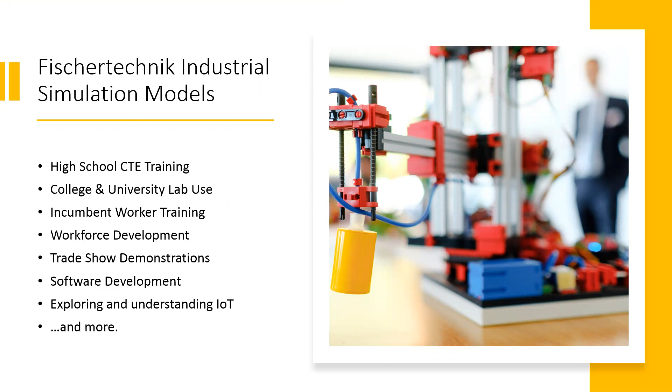Now, whether you're an educator at the high school level involved in CTE training, a college professor, or industrial trainer teaching programmable skills required in manufacturing, a company looking for ways to demonstrate their software-based solutions, or someone looking for ways to make IoT-related concepts easier to understand to employees or customers, I believe this presentation will offer some important options for you to consider.

Let's start off by considering the skills gap. If you've attended any of our other Fischertechnik education webinars, you've probably heard me discuss the importance of STEM education. STEM, of course, is the acronym for science, technology, engineering, and mathematics, and it should go without saying that STEM education has become perhaps the most discussed topic in education for the last decade.

As most of us are aware, the push for developing STEM skills in students is in large part to help best prepare them to take their place in the modern workforce. Not so long ago, when our parents or grandparents were entering the workforce, employers in such areas as manufacturing might have been satisfied with hiring workers who could demonstrate good motor skills and a solid work ethic.

But as manufacturing becomes more and more dependent upon automated processes and robotic control, employers now desperately need individuals who have a background in areas such as mechatronics, industrial electricity, mechanical components, and programming PLCs. As it ties in directly with the solutions we will be looking at in this presentation, let's consider the last skill area I just mentioned, that of a PLC programmer.

First off, for anyone who may not be familiar, let me explain exactly what a PLC is. The term PLC is an acronym, the letters of which stand for Programmable Logic Controller. Essentially, a Programmable Logic Controller, or PLC, is a very specialized computer used to control the types of machines and automated processes typically found in industrial settings, such as an automated manufacturing plant. Now, as the world of manufacturing becomes increasingly dependent upon these automated control systems, the need for workers skilled in the programming of such systems grows exponentially.

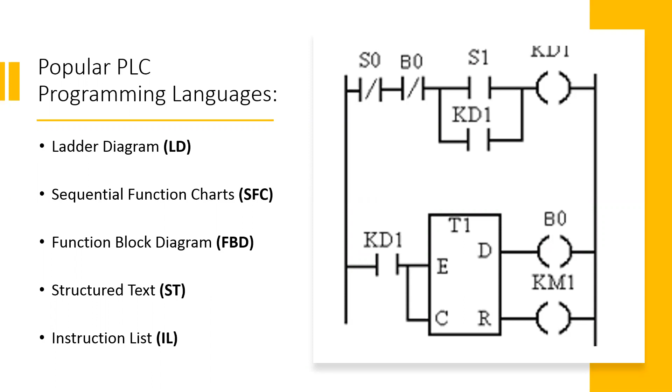We of course see the 5 most popular programming languages listed here, which are ladder diagram or LD, sequential function charts or SFC, function block diagram, FBD, structured text, ST, and instruction list, IL.

Now, once again, while many students can learn programming skills in a college lab setting, there are many other options available as well. There's high school CTE, career and technical education programs, adult continuing ed programs, vocational training, technical training and trade schools, and employer-sponsored incumbent worker training programs.

Now, that all being said, the question that still arises for the educator, whether it's in the university or the vocational school setting, is how do you teach PLC programming in a way that makes it engaging and relevant to the student, whatever their background? So how do you get away from the dryness of textbooks and video presentations and instead make it more realistic and hands-on?

But before we go further, there are other areas of focus beyond programming that need solutions for demonstrating, exploring, and understanding different aspects of automation and control systems. Now, it could be a company involved in creating or marketing a new type of software-based solution, looking for ways to make more tangible processes, which might otherwise be perceived as abstract, or to test it out in a more

realistic fashion. Maybe it's a manufacturer looking for a way to better visualize the production process for workers or stakeholders as they prepare to build a new factory. Or perhaps it's a company looking for an engaging way to demonstrate their services or solutions in a public setting, such as a trade show. Now, in each of these cases and more, there is a need for finding a solution that is engaging and which can effectively mimic and simulate real-world automated systems.

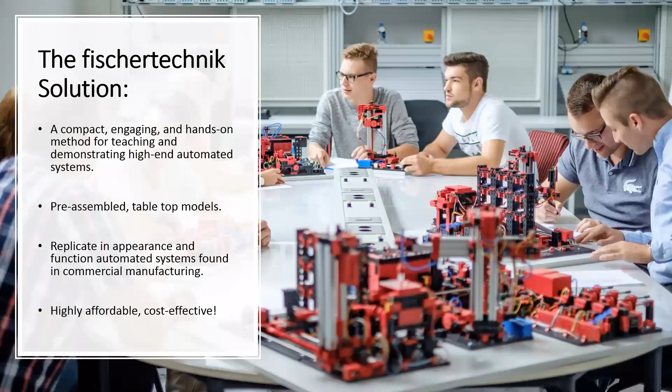And that brings us to the line of fischertechnik industrial simulation and training models. These models have been designed with the intent of providing a compact, engaging, and hands-on method for teaching and demonstrating high-end automated systems. The line consists of a series of pre-assembled small-scale models which are designed to replicate, both in appearance and function, various automated robotic machines and systems commonly used in commercial manufacturing.

Now, before we look at each of these models, let me provide you with just a little bit of background. Fischertechnik has been creating tools for teaching students of all ages how technology works for over 50 years, based around their unique building system. Now, what makes this system unique is that unlike other popular construction systems where the components are designed to simply stack, with the Fischertechnik system, it was created with more of an engineering mindset.

The core building block in the Fischertechnik system is designed to enable attachment from all 6 sides, and thus it allows for almost limitless design possibilities. Now, many of the parts in the Fischertechnik system are designed to slide together and lock in place, and the hundreds of different parts available also help to address very specific design needs.

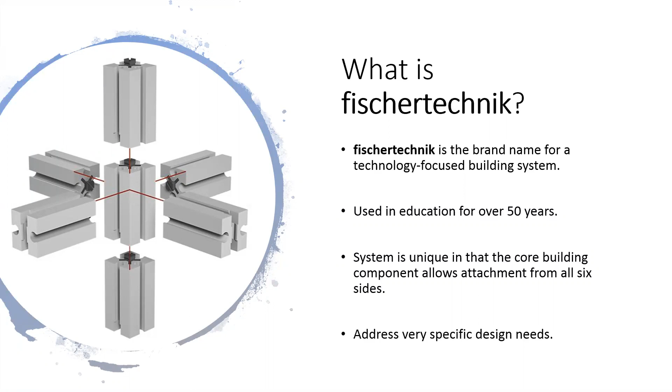The Fischertechnik system was created back in the 1960s by German inventor Artur Fischer, who's noted for countless innovations used in the construction and the automotive industries. Mr. Fischer, at the time of his death in 2016, held more patents in his name than Thomas Alva Edison had amassed during his own lifetime.

Now, besides Fischertechnik, Mr. Fischer was the inventor of synchronized flash photography back in 1949, as well as the creator of the expanding nylon wall plug, which is used in conjunction with a screw or a bolt to help anchor heavy objects to walls. His company, the Fischer Group, employs thousands of individuals worldwide, producing many variations of fastening devices used in building construction. They also produced numerous components used in the automobile assembly method, as well as providing consulting services to companies who wish to employ state-of-the-art manufacturing processes.

Now, once again, the focus of the Fischertechnik sets, whether those intended for the retail market or for classroom use, has always been on helping to foster an understanding of technology. Many of the products offered by Fischertechnik for the education sector are subject-specific sets focusing on different STEM-related skill areas such as mechanics, pneumatics, robotics, or renewable energy. Now, in many of these sets, students are asked to build a progression of models using the unique Fischertechnik system and then perform various experiments which allow them to explore and understand aspects of that subject.

Now, there are also sets designed to enable schools to offer a complete standards-focused curriculum-based program where the focus is on project-based learning. Now, in these project-based programs, students dive deep into engineering and learning all aspects of the design process, which requires them to work in groups and create various devices and automated machines to meet the criteria put forth in a series of real-world scenarios based upon their own trial and error experimentation and research.

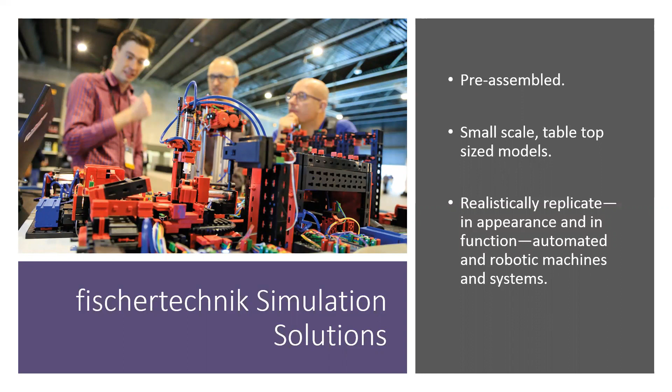Models in the fischertechnik simulation line include conveyor belts, punching machines, 3-axis pick-and-place robotic arms, color sorting lines, high-bay storage warehouse systems, and many more.

Now, besides these individual models which focus on specific automated processes, fischertechnik also offers an integrated factory simulation model. This model consists of 4 individual workstations, a vacuum gripper robot, a high-bay storage warehouse, a multi-processing station with an oven, and a sorting line with color detection, all working together as one self-contained material cycle.

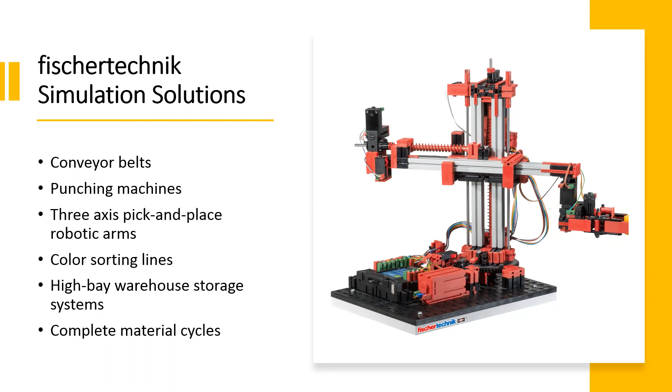Now, before we look at the models in the simulation line in more detail, let me briefly outline some of the advantages of using fischertechnik solutions. Now, I do apologize in advance if the first few points are things I mentioned earlier, but I think in each case it's worth repeating.

First, fischertechnik simulation solutions allow educators to offer engaging hands-on tools for teaching, exploring, and understanding various aspects of automation and programming. Now, this can be for understanding how automated systems work, or for having a tangible physical system to observe and work with in a PLC programming-focused learning environment.

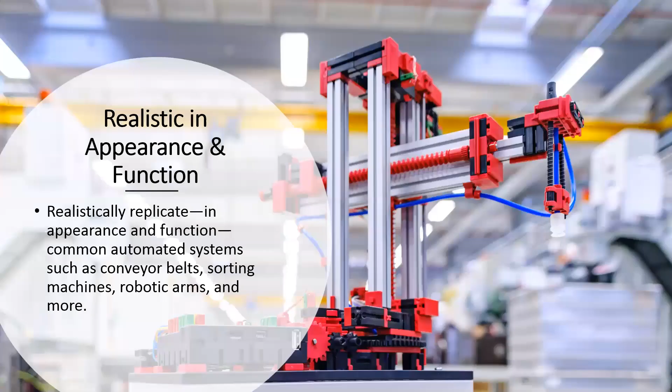Advantage 2. The models, once again, are designed to realistically replicate, both in appearance and function, common automated systems such as conveyor belts, sorting machines, robotic arms, and much more. Now, because the models are compact, in most cases tabletop sized, they are not only ideal for use in the classroom or in office demonstrations, but also for demonstrating software or other technology-based offerings in a trade show environment.

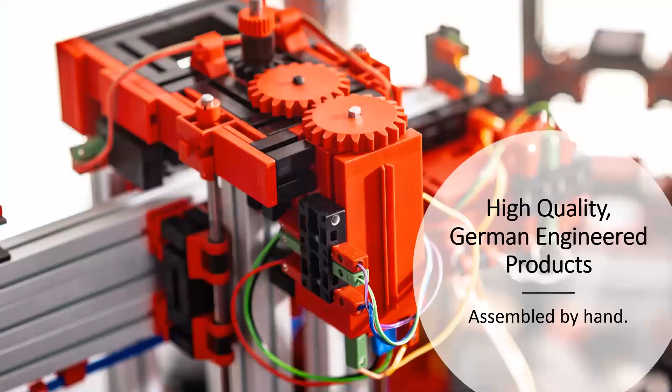Another factor is quality. Each fischertechnik simulation model is a hand-assembled, high-quality, German-made product. Each model, with one exception which I will address later, is currently available in 2 different versions. The first version is a 24-volt version, which is designed for use with industry-standard PLCs. Now, whether you use Allen Bradley controllers, Siemens controllers, or controllers from manufacturers such as Honeywell, Mitsubishi, General Electric, or others, you can control these 24-volt versions with the PLC you prefer.

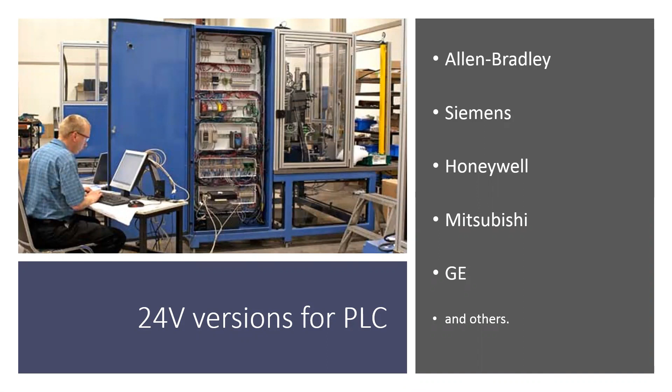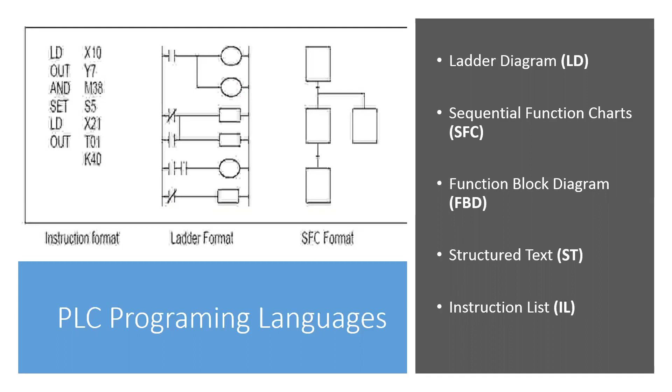Likewise, just as you can use your choice of controller, you can also use your preferred programming language, such as the ones you see listed on the screen now. Now, please note that with the 24-volt versions, no PLC is included, and all programming and programming guidance, as well as any power sources or other hardware, are the responsibility of the end user. Of course, this should not be an issue, as these models are designed specifically for industrial users, or for those users teaching or exploring industrial processes involving PLC programming.

On the other hand, for non-industrial users and educators not versed in or familiar with PLC programming, there are also 9-volt versions of each model available. Now, these 9-volt versions ship pre-wired to fischertechnik's own proprietary robotic controllers, the Robotics TXT controller, and each controller is pre-programmed using fischertechnik's own RoboPro graphic programming software.

Now, the only additional component required with the 9-volt versions will be the addition of 1 or more 120-volt power adapters as specified with each model. I will address this as we look at the various models so you'll know what needs what. But otherwise, in most cases, these should be ready to use out of the box.

Now, if you're involved in demonstrating or exploring IoT, also known as the Internet of Things, besides the fact that many end users have adopted many of the models in the primary line of simulation and training solutions for IoT purposes, fischertechnik also offers a special IoT-focused version of the factory simulation designed specifically for exploring and understanding cloud control and what is sometimes referred to as Industry 4.0. Now here, the model is designed to be both controlled and monitored from a special web-based dashboard. We'll of course discuss this in more detail later in the presentation.

And finally, fischertechnik simulation models are cost-effective. While I won't get into naming names, I will say that if any of you have looked into other hardware-based industrial simulation options that are available in the marketplace, you'll probably notice that the entry point for many of these products could easily be $20,000 to $30,000 or more. fischertechnik simulation solutions, on the other hand, are only a fraction of that price, as well as being compact, realistic, and high-quality learning and demonstration tools. So on that note, let's look at each of the models which are available.

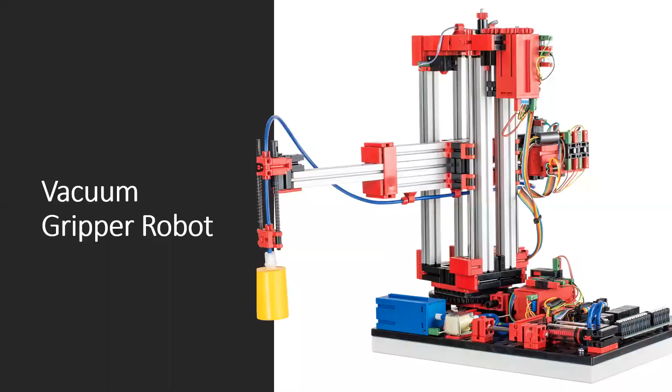First up is the vacuum gripper robot. Now, as you will soon see, the vacuum gripper is a 3-axis robotic model with a vacuum gripping device. The model is designed to precisely pick up and position workpieces in 3-dimensional space.

The model includes 3 encoder motors, 3 push-button limit switches, a vacuum suction device, a compressor, which is the blue brick component that you see on your screen in the video, and a solenoid valve. The model's dimensions are approximately 9 by 19 by 15 inches with an approximate weight of about 7 pounds.

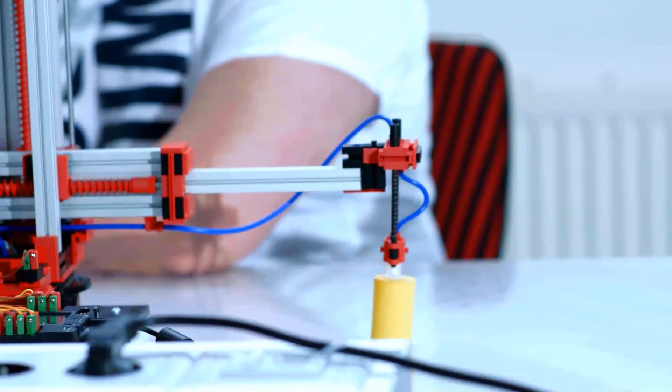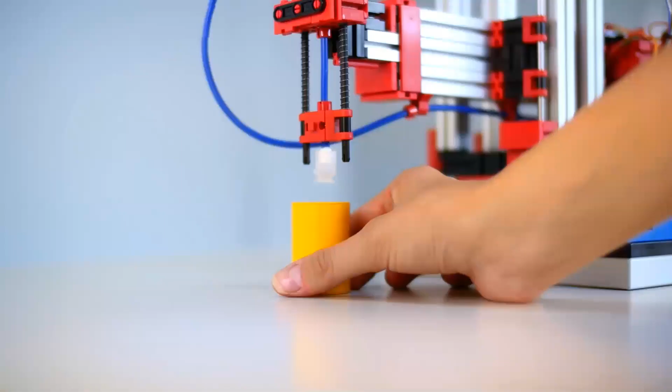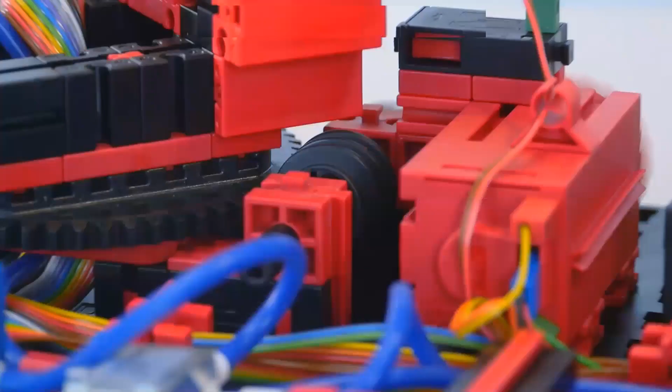Now, the 24-volt versions of this model, as well as the other 24-volt versions we will look at, each have a relay board for motor polarity reversal and both a multi-pin connector with 26 pins with a grid of 2.54 millimeters, as well as additional PCB terminals with push-in connectors for all inputs and outputs. Now again, the 24-volt version of this model, as with all of the 24-volt versions we will look at, will require you to provide the PLC and the programming.

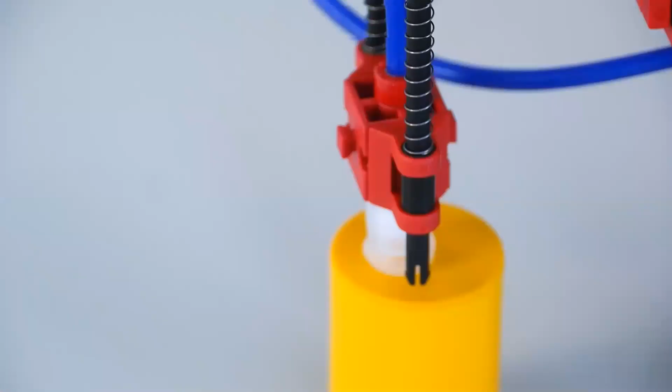Now the 9-volt version, which is the version that you actually see in this video, will once again come wired to the fischertechnik robotics TXT controller and will ship fully programmed using RoboPro graphic programming software. Now, if you wish to create your own programming, individual licenses of RoboPro are available on our website. Otherwise, for this 9-volt version, only the addition of a single power adapter will be required.

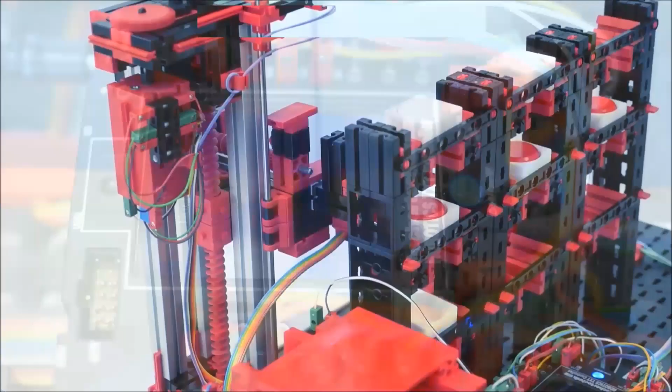Next, we have the automated high bay warehouse. The model features a transfer station with a conveyor belt, along with a shelf stacking mechanism for storing and retrieving workpiece carrier trays, and 9 individual storage spots. Components of this model include 2 encoder motors, 2 mini motors, 4 push-button limit switches, 2 phototransistors, 2 LED light barriers, and a selection of different colored workpieces along with carrier trays for each.

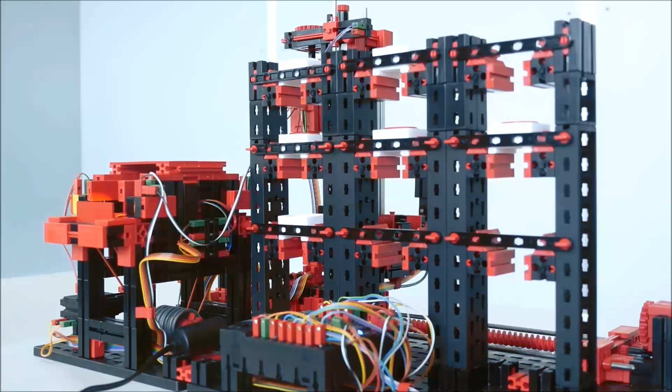I will note that this model is a favorite among educators I know who are teaching programming because it gives you a lot to work with in regards to the movements of the picker mechanism, as well as the precision required to properly store and retrieve each piece, each step, which will of course require its own specific coding. Now, the dimensions for this model are approximately 19 by 28.5 by 15 inches with a weight of approximately 18 pounds.

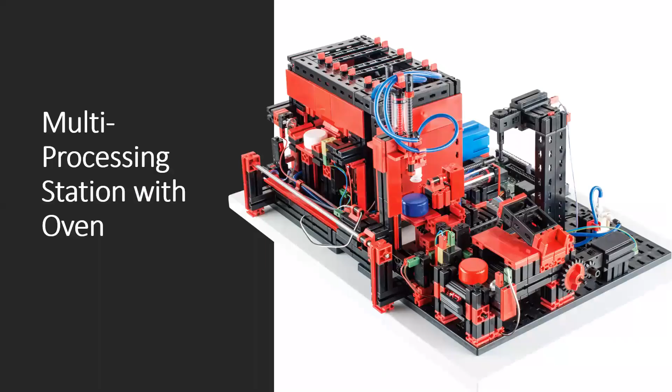Once again, the 24-volt version has a relay board for motor polarity reversal and both a multi-pin connector with 26 pins with a grid of 2.54 millimeters, as well as additional PCB terminals with push-in connectors for all inputs and outputs. Again, you will need to provide your own PLC and programming. The 9-volt version again is pre-wired to a pre-programmed robotics TXT controller, and one 120-volt power adapter is required.

Now, the next model, as you see already on your screen, is the multi-processing station with oven simulation.

And it should start up in just a second. Just catching a second here. Excuse me for the slight technical malfunction here. I think we're good to go now.

Once again, we're looking at the multi-processing station with the oven. Now, the model you're going to see features a furnace simulation with a pneumatic sliding door. Now, there's a downstream processing station with the pneumatic transfer unit that includes a vacuum gripper, a cutter with a rotary table, and a conveyor belt.

Now, components used on this model include 4 mini motors, 6 push-button limit switches, 2 phototransistors, 2 LED light barriers, 4 solenoid valves, and a compressor. The dimensions for this model are approximately 20 by 14 by 12 inches with a weight of about 11 pounds.

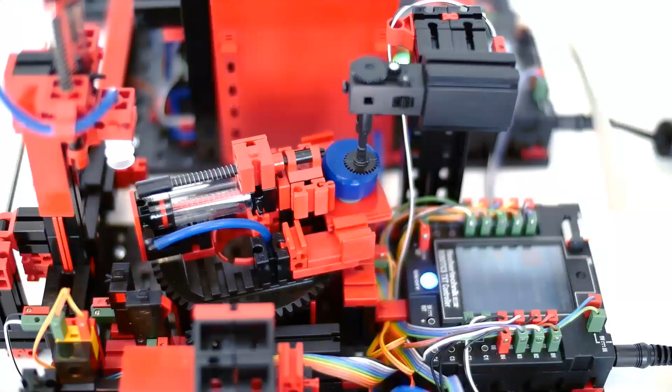Now again, this model is available in both 24-volt versions for use with the PLC of your choice, and the 9-volt version in this case is connected to 2 robotics TXT controllers. So in this case, you're going to need 2 power adapters, which will be required for all the operations. We'll just let this play for a minute.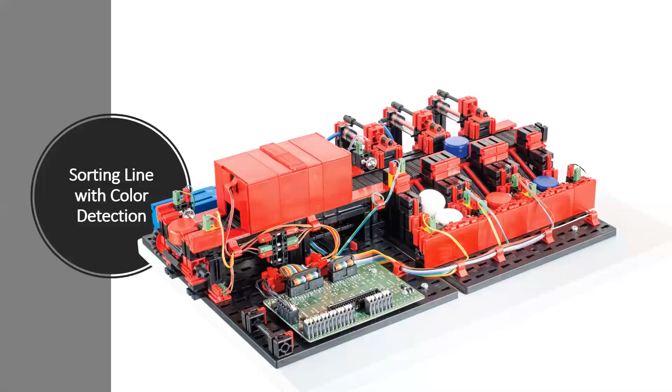Now, the next model in our progression is the sorting line with color detection.

And we don't need the audio here. So we will kill that.

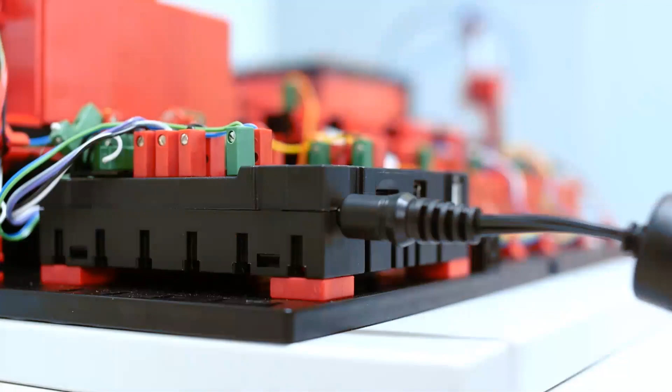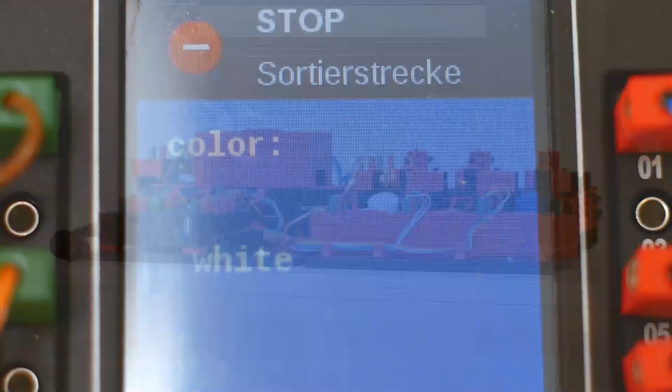Now, this simulation features a system for detecting workpieces of different colors and sorts them via a conveyor belt into 3 different storage bins. Now, components on this model include 2 mini motors, 5 phototransistors, 5 LED light barriers, 3 solenoid valves, a compressor, and an optical color sensor. The dimensions for this particular model are approximately 20 by 14 by 12 inches with a weight of about 10 pounds.

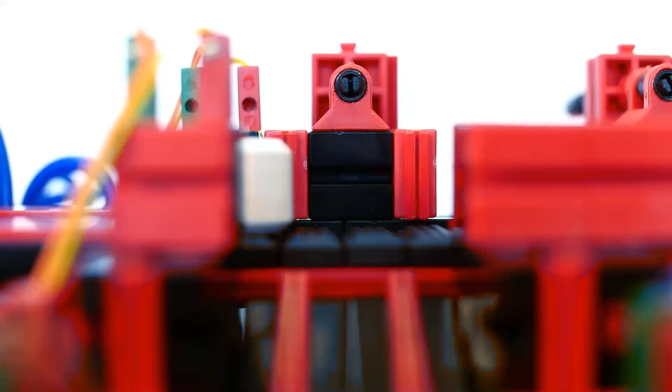Now, as with the models we've looked at before, the 24-volt version has a relay board for motor polarity reversal and both a multi-pin connector, again 26 pins with a grid of 2.54 millimeters, as well as additional PCB terminals with push-in connections for all inputs and outputs. Again, you need to provide the PLC and the programming. The 9-volt version, once again, comes pre-wired to a pre-programmed TXT controller, and so only 1 power adapter is going to be required with this.

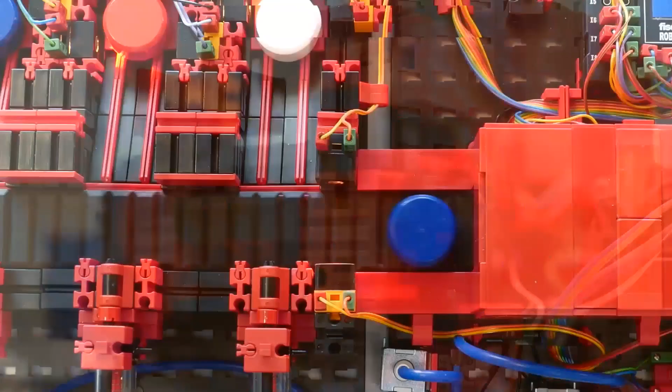Now, the next model is the factory simulation, which combines the 4 models that we've just reviewed here: the vacuum gripper robot, the automated high bay warehouse, the multi-processing station with the oven, and the sorting line with color detection, all of which are combined into one self-contained material cycle.

Now, the cycle works like this. Work pieces are retrieved from the automated high bay warehouse using the vacuum gripper robot and then moved to the multi-processing station with oven. After the work piece has been processed by this machine, it is then sorted by color in the sorting line with color detection before being again moved by the vacuum gripper robot to the automated high bay warehouse for storage.

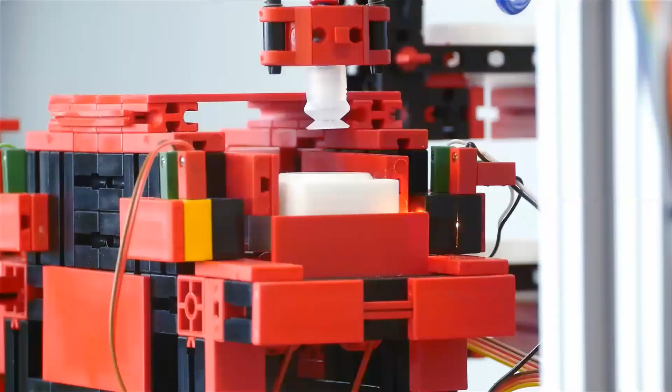Now, as we've already discussed the components of each model previously, I won't belabor it by restating them here. What I do want to discuss are the dimensions of this model as a whole. Now, as it again combines 4 individual models into one cycle, it has a much larger footprint. And in this case, it's approximately 39 by 31 by 16 inches, and it has a total weight of between 43 and 46 pounds, depending on whether we're talking about the 24-volt version or the 9-volt version.

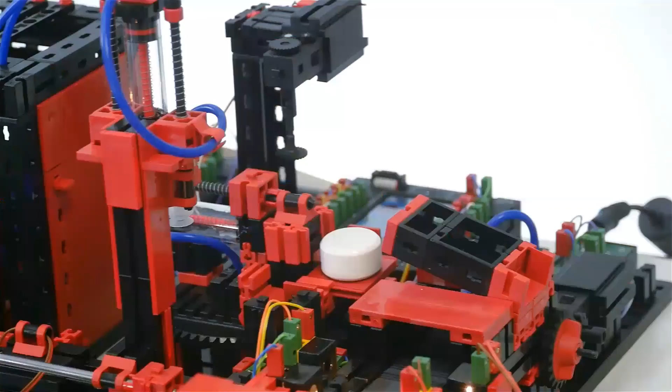Now, due to these dimensions, please note that this model will only be shipped flat as freight on a pallet. And I also want to point out that the factory simulation models tend to be in very high demand, so please anticipate a possible turnaround time of up to 3 weeks prior to any orders for this model leaving our warehouse. Now, a few other things to note.

First, this is again available in both 24-volt and 9-volt versions. Now, in this instance, the 9-volt version is wired to 5 robotics TXT controllers. As such, it's going to require 3 power adapters because of the way the controllers are wired together.

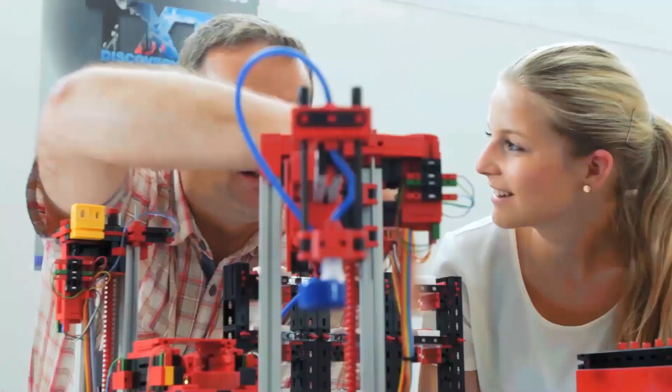And as always, the 24-volt version will require the end user to provide all PLCs, all programming, and any other hardware required. Again, each station on the 24-volt version has a relay board for motor polarity reversal and both a multi-pin connector, 26 pins with a grid of 2.54 millimeters, as well as additional PCB terminals with a push-in connector for all inputs and outputs.

Now, before we move on to the next group of models, I do want to mention that there is a storage option available for those users of either of the 2 factory simulations we've just discussed, who will need to transport the model or who would like to protect it when it's not in use. Now, the travel case consists of an aluminum case maker profile with plastic plates and steel ball corners, as well as 4 steel tilt handles and angle protection corners.

The upper section of the case is partially lined with soft foam blocks in different heights to help cushion the model, and it also has 3 internal zipper pockets for storing cables and other accessories. Now, the lower portion is lined with hard foam, and it's designed so that once the top of the travel case is removed, the model can remain in the bottom section of the case and be fully functional.

The case has exterior dimensions of approximately 41 by 33 by 17 inches with a weight of approximately 53 pounds. Please note, though, that even when using the travel case, these models will still need to be shipped flat.

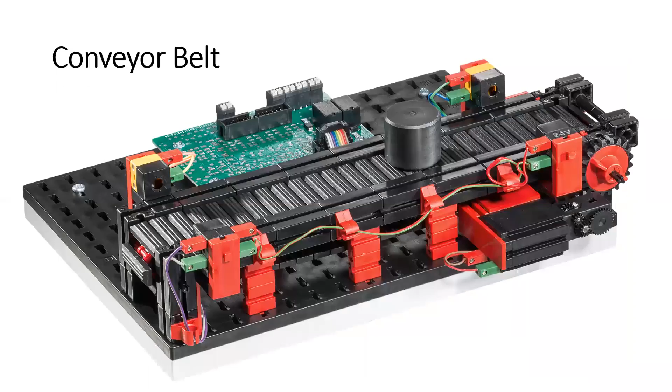The next model is a basic conveyor belt. Now, this is a transport belt with a length of 275 millimeters that is used to transport workpieces with a diameter of up to 29 millimeters. Multiple conveyors can easily be connected to increase the length of transport as desired.

Now, components on this model include an XS motor, a push-button limit switch, 2 photo transistors, and 2 LED light barriers. Dimensions of this model are approximately 14 by 10 by 4 inches with a weight of under 2 pounds. Now, as I mentioned before, this is available in both a 24-volt version, as you see here, and also 9-volt versions connected to the robotics TXT controller as shown here. One 120-volt power adapter is again required for operation.

The next model is a variation of the conveyor belt, which includes a punching machine. This feature is essentially the same conveyor as we just looked at, except this time with the machining station built in. Components on this model include 2 XS motors, 2 push-button limit switches, 2 photo transistors, and 2 LED light barriers. Dimensions of the model are approximately 15 by 12 by 7.5 inches with a weight of about 3.5 pounds.

Again, it's available in both the 24-volt variation as shown in this photo and in the 9-volt version wired to the robotics TXT controller, which requires one 120-volt power adapter for use.

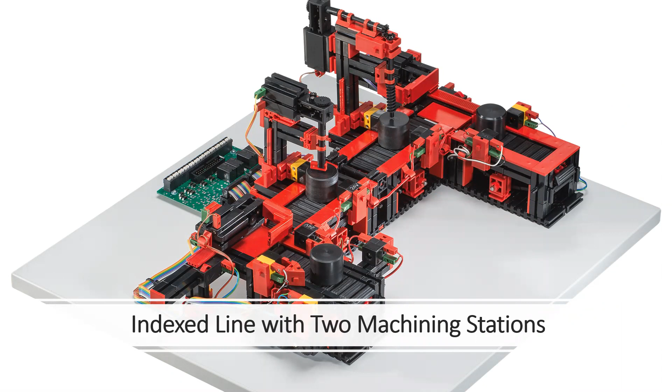The next model is the indexed line with 2 machining stations. Now, this model features a U-shaped conveyor line consisting of a milling and a drilling station and 4 conveyor belt sections. Components on this model include the 4 conveyor belts I just mentioned, 8 XS motors, 4 push-button limit switches, 5 photo transistors, and 5 LED light barriers. The dimensions of the model are approximately 19 by 18 by 11 inches with a weight of about 8 pounds.

Again, it's available in both the 24-volt version for use with PLC as shown here, and a 9-volt version wired to the pre-programmed robotics TXT controllers, 2 of them as you see here, and requiring in this case 1 power adapter.

Next is a variation on the idea of a pick-and-place robot, which is the 3D or 3-axis robot.

Hang on a second here.

The 3-axis robot has gripping forceps, which it uses to help it quickly and precisely position the workpieces it picks up in 3-dimensional space. The degrees of freedom for the robot are as follows. Axis 1 turns 180 degrees. Axis 2 can move forward or back 90 millimeters. And axis 3 can raise or lower 150 millimeters.

Components on this model include 2 XS motors, 2 encoder motors, and 4 push-button limit switches. Dimensions of this model are approximately 19 by 16 by 9 inches with a weight of about 6 pounds. Again, as with the other models we've looked at, this is available in both a 24-volt version for use with PLC and the programming of your choice, or a 9-volt version wired to a pre-programmed robotics TXT controller and requiring one 120-volt power adapter.

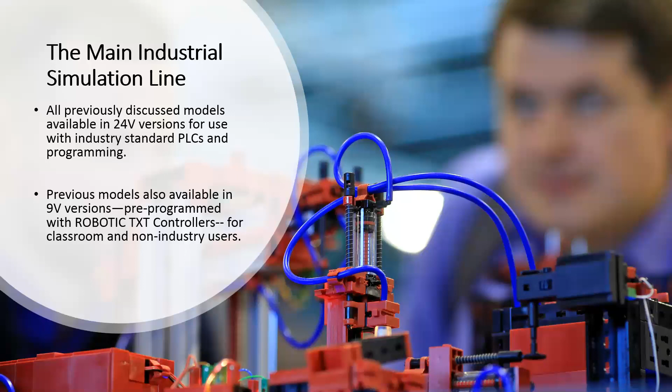Now that concludes our look at the first 9 variations of simulation models, all of which again are available in both 24-volt versions and 9-volt versions. Now the next simulation model is designed to specifically address the topic of cloud-based monitoring and control. This is the Training Factory Industry 4.0 model.

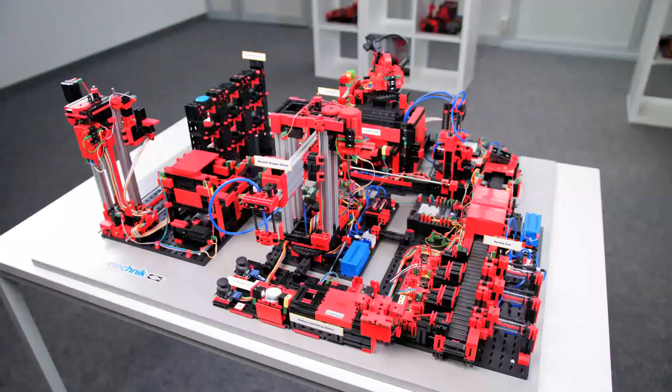Now, this model was designed to help address how the recent changes in industrial production, driven by digitization, have created a need for stronger networking and more relevant information on all production levels. With this Industry 4.0 update of the existing factory simulation model, such digitization activities can be simulated, learned, and applied on a small scale before they are implemented on a large scale. Now, as the following video provides a nicely narrated overview of how the factory works, I'm going to step back for a moment and allow you to watch and listen to the narrator here.

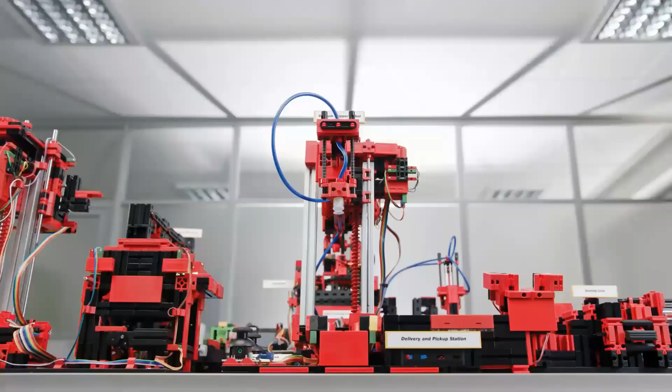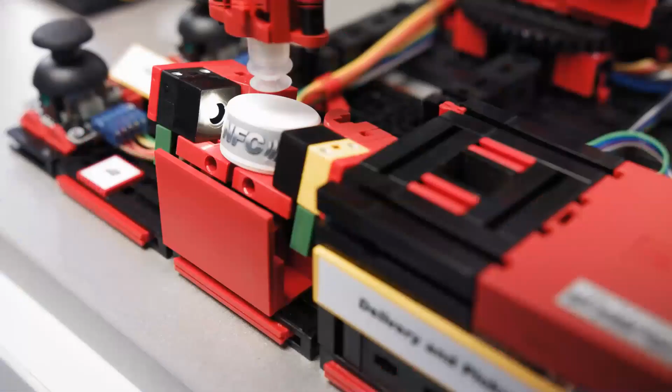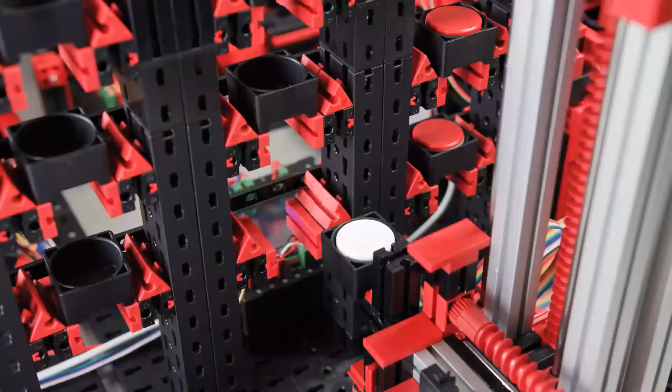Fischertechnik Learning Factory 4.0 illustrates processes for a digitized smart factory, from delivering raw material to the finished product. Industry 4.0 applications can be tested and demonstrated using the simulation model that has already been set up. Digitization activities are simulated on a small scale and learned before they are used on a large scale. The training and simulation model demonstrates the process from the delivery, collection, and storing of the materials through the ordering and the manufacturing processes to delivering the finished product. The 6 Fischertechnik TXT controllers control the learning factory. The controllers communicate with each other via standard MQTT protocol. The controller programs are written in C, C++, and the controllers arrive with the programs already loaded on them so that they can be used right away. The programs can be changed and customized.

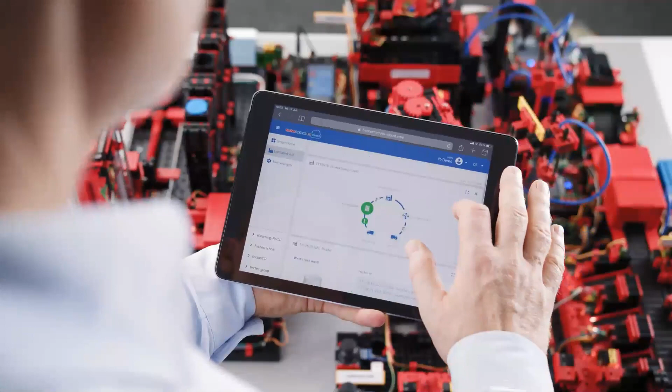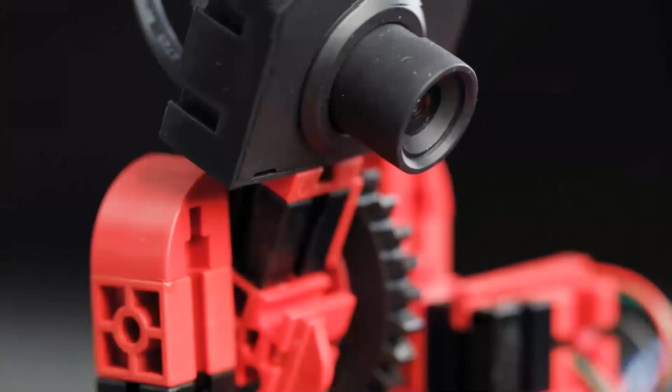The sensor image data are used and monitored in the Fischertechnik cloud. The integrated WLAN router transmits factory process data to the cloud in real time. The data is presented on a web-based dashboard. 3 views are available: the customer view, supplier view, and production view. Views and data can be accessed using internet-enabled devices and can also be used remotely. The USB camera is controlled from the cloud and can view the entire factory. A sensor station measures air pressure, air quality, temperature, humidity, and brightness.

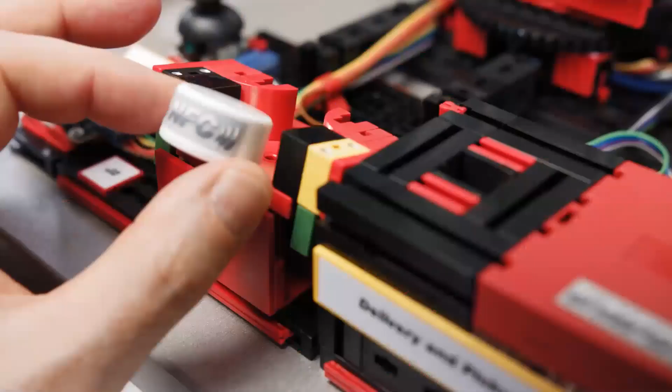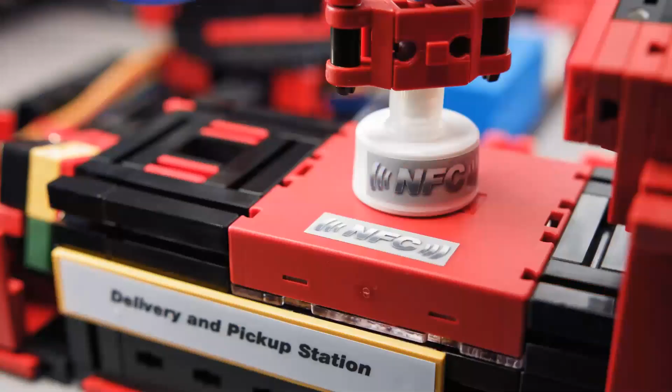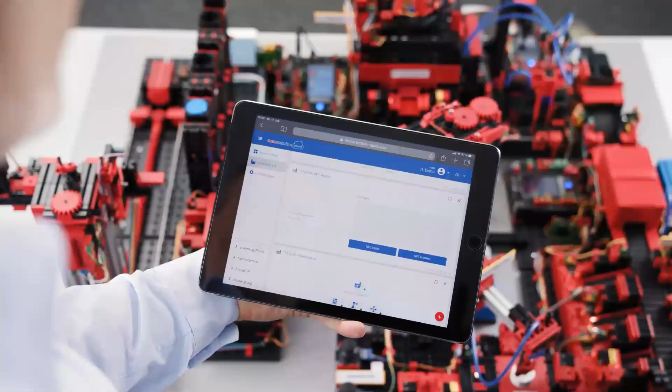The default process cycle begins with storing and identifying the material. Using RFID NFC technology ensures that the material can be digitally traced. The integrated NFC tag stores production data that can be read out via the RFID NFC module. The cloud displays the part's color and the ID number. The vacuum gripper places suction on the material and transports it safely to the high bay warehouse. The production view on the dashboard shows where the product is in the manufacturing process.

The high bay warehouse is organized chaotically. There is no fixed space for a material to be stored. The system simply recognizes the next available space. Ordering material is triggered online on the dashboard. The desired product and the corresponding color are selected in the customer view and then placed in the shopping cart.

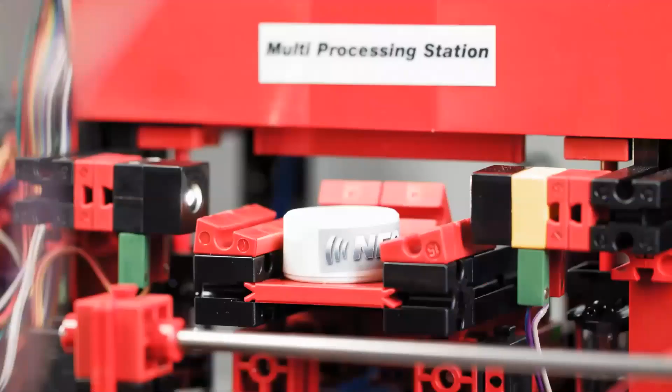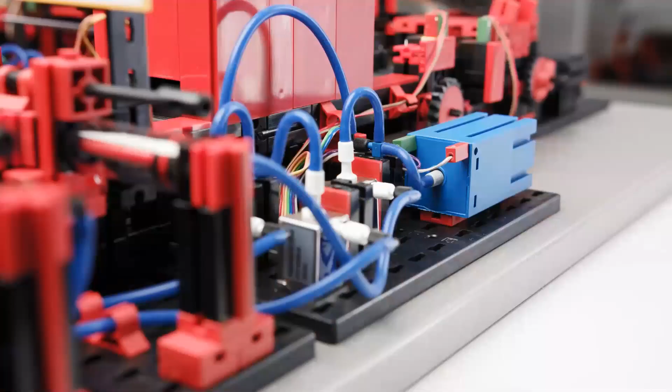Customer-specific production takes place in lot size 1. The production process is simulated in 2 steps. The suction gripper passes the material on from one step to the next. Material is transferred to the sorting system once production is complete. The sorting system receives the allocation command as soon as the color sorter detects the proper color. The material is sorted using pneumatic cylinders.

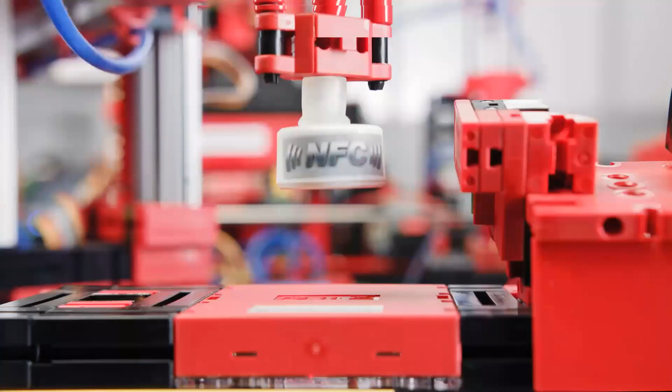The production data is written on the material at the end of the production process. The finished product will be provided for collection. Instructional material and the source code for the stored programs are available online.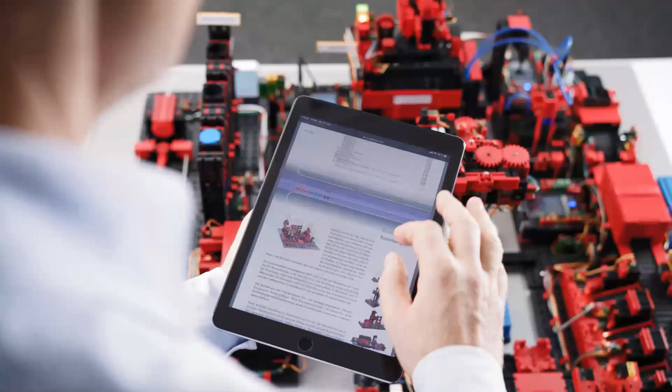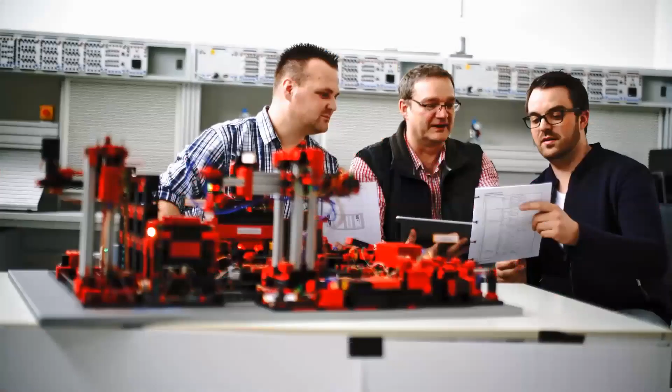FischerTechnik Learning Factory 4.0 is ideally suited for education and training in vocational schools and companies, for research and teaching in colleges and universities, for development projects in IT departments, for production planners, and for demonstrating in-house software solutions at trade shows and other corporate events. The customized storage and transport case is a worthwhile add-on.

Pretty impressive, I hope you'll agree. Now, just to kind of summarize some of what we've heard, the following topics can be addressed with the FischerTechnik Training Factory Industry 4.0 model.

And I hope you'll ignore the delivery driver who's learning how to use his horn today.

But anyway, going back. Some of the topics you can address with the FischerTechnik Training Factory Industry 4.0 include training and simulation on a realistic production model, in-depth learning through haptic comprehension, optical and sensory applications, digital traceability with NFC/RFID technology,

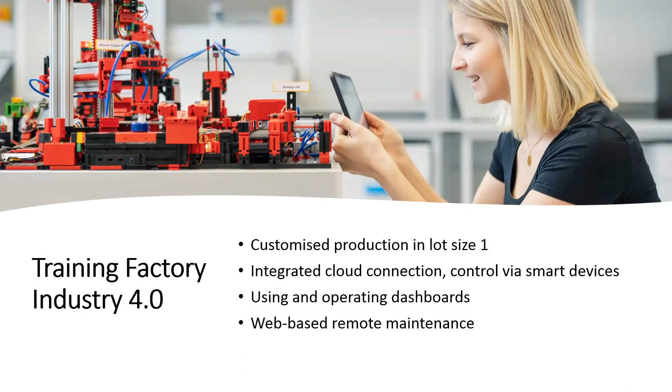customized production in lot size 1, integrated cloud connection and control via smart devices, using and operating dashboards, web-based remote maintenance, linking of production and material planning data, connection of upstream and downstream logistics processes, and for experts, the creation of your own unique programming using C, C++.

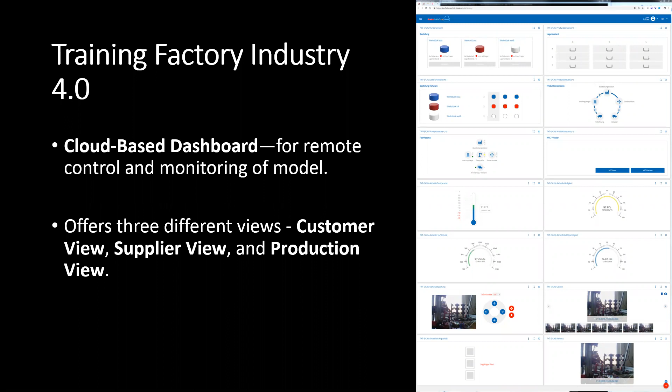Now, as you just saw, the model incorporates many features not found in the models we've previously discussed, most notably the use of the cloud-based dashboard for monitoring and controlling the model. Some other examples would be the camera for visually monitoring the factory functions from the cloud-based dashboard, as well as the environmental sensor which collects data on variables such as temperature, air quality, humidity, and air pressure.

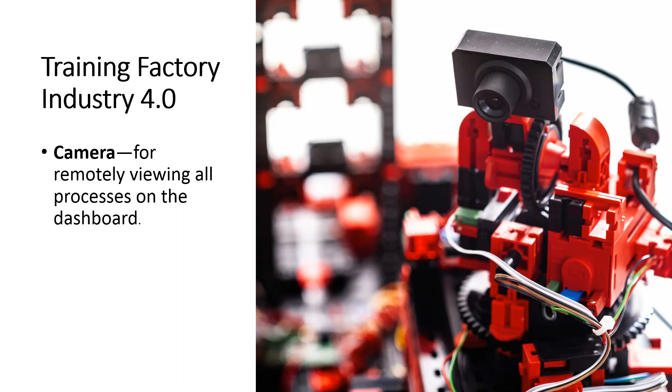The use of NFC chips in each individual workpiece, each of which has a unique identification number, enables the positions of each piece in the work cycle to be mapped. And the use of MQTT, message queuing telemetry transport, allows the networked TXT controllers to communicate with each other.

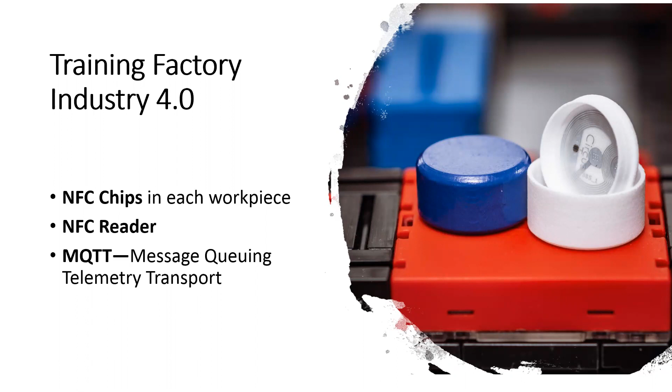Now, as discussed, this model is currently only available in a 9-volt version, with the control facilitated through the use of, in this case, 6 robotics TXT controllers. Now, unlike all other 9-volt versions we've looked at previously today, these are programmed not using RoboPro, but instead using C, C++. Now again, all of the programming is preloaded so that once connection to the internet and the cloud-based dashboard are made, all of which are clearly outlined in the downloadable documentation PDF that you saw them looking at in the video, you should be able to get started quickly.

Now, dimensions for this model are approximately 39 by 31 by 16 inches, and the weight is approximately 53 pounds. Now, I will note that this 9-volt version will require the addition of 3 120-volt power adapters and the ability to access the internet, as well as, of course, a tablet or a device for accessing the cloud-based dashboard. Now, as with the 2 factory simulation models we discussed previously, we recommend the travel case to help protect your model during transport or storage.

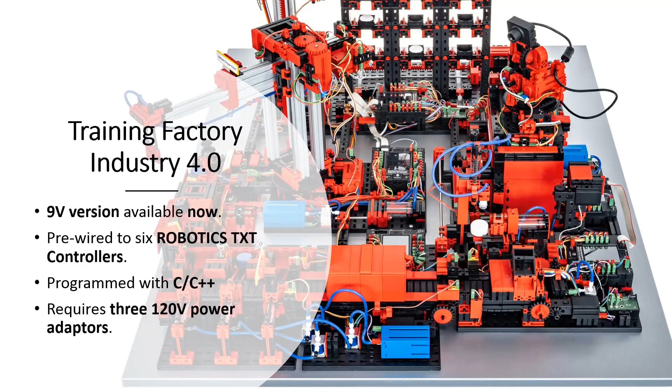Now, this of course begs the question, so what about a 24-volt version? Well, the answer is that version is expected to be formally announced very shortly. The original plan was that we would have this available for ordering by late spring, but with the disruptions caused by the COVID-19 crisis pushing everything back somewhat, we're hopeful to get an announcement by later this summer.

And that essentially is the Training Factory Industry 4.0 model. Of course, you're probably wondering how much these models cost. Let's take a quick review of each option we've looked at, along with the pricing for each of them.

First, we'll start with the vacuum gripper robot. As you'll see, the 24-volt version, with the part number there, is $899 each, and the 9-volt version is $1,199. You will note that in most cases, the 24-volt versions are going to be more reasonably priced than the 9-volt version, and that is, of course, because the 9-volt versions all come, once again, pre-wired to the controllers, where with the 24-volt versions, you will be supplying your own PLC for the control systems.

Next, the automated high bay warehouse. The 24-volt version has a list price of $1,035. The 9-volt version has a list price of $1,319. The multi-processing station with oven, once again, the 24-volt version is $989, and the 9-volt version is $1,479. The sorting line with color detection has a 24-volt price of $819 and a 9-volt price of $1,129.

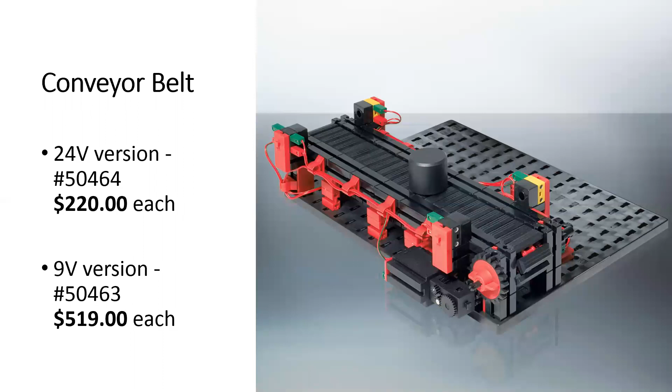The full factory simulation in the 24-volt version, it is $3,729 list, and the 9-volt version is $5,239 list. The conveyor belt, $220 for the 24-volt version, and $519 for the fully wired pre-programmed 9-volt version. The punching machine with conveyor belt, the 24-volt version is $289 each, and the 9-volt version with the controller is $599.

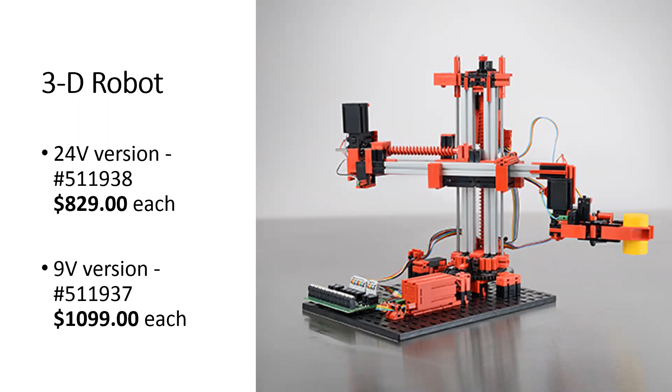The 3D or 3-axis robot, in the 24-volt version, it is $829 each. The 9-volt version, once again pre-wired to the TXT controller, is $1,099 each. The indexed line with 2 machining stations in the 24-volt version is $879, and in the 9-volt version is $1,399.

And for exploring, teaching, or demonstrating cloud-based monitoring and control of automated systems, there is the Training Factory Industry 4.0. Again, this model is currently available only in the 9-volt version, with the 24-volt version to be released soon. And as you see, the 9-volt version has a price of $6,495 list, and the 24-volt version is still to be determined. And once again, we should announce all of those details later this summer.

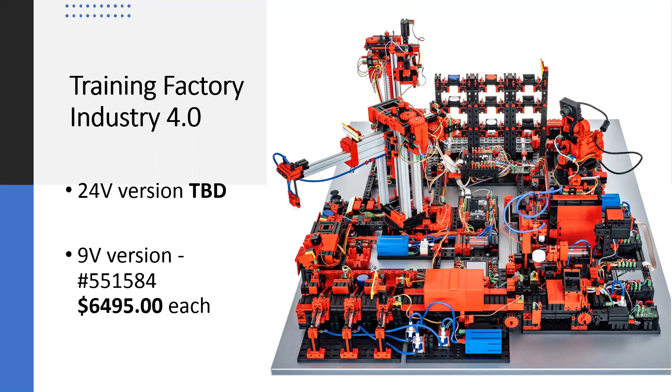Now, as I've also mentioned at various points during the presentation, the 9-volt models will require 120-volt power adapters for operation. Now, these are available at a cost of $12.99 each. The 24-volt versions, again, as I have mentioned numerous times throughout the presentation, will require the end user to have or obtain their own choice of PLC and to provide all programming required, all power supplies, and any other hardware required.

And once again, if you wish to purchase one of the aluminum and plastic travel cases for either version of the factory simulation or for the Training Factory Industry 4.0 model, in either the current 9-volt version or the forthcoming 24-volt version, the case to fit all of these models is available at a cost of $1,000 each.

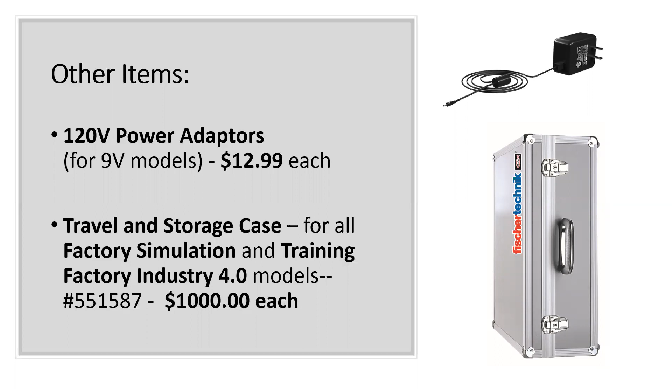Is there curriculum with this? Asks Sam. No, there are not specific curriculum elements with these. I will say that with the factory simulation models, whether it be the 9-volt, 24-volt standard versions, or with this Training Factory Industry 4.0 model, there are materials that come with it that will outline some exercises you can do and things of that nature, different teaching material, but I won't go so far as to call it full curriculum.